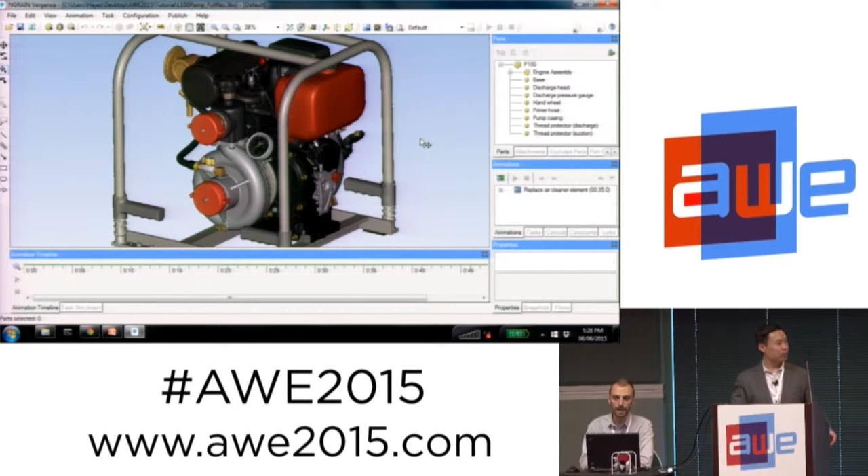Barry kind of alluded to this. This little 3D printed pump that we've got, what you get with that kit that comes packaged with the BT200s.

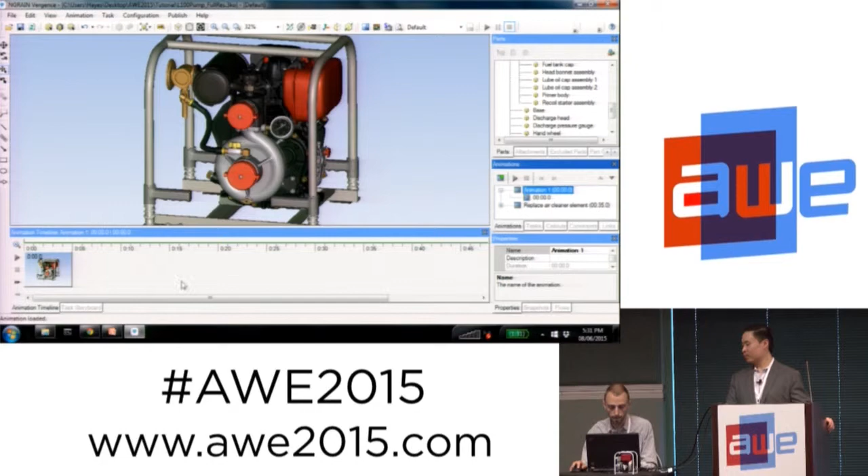Another thing that we can do is create simple little animations. I'll show you what that looks like. All I've done is click this button, say create new animation, and in my animation timeline at the bottom, it's created a keyframe. All I need to do now is manipulate my workspace. Say I want to move in here, and I double click to create a new keyframe. What that does is the system will now interpolate between these keyframes. So this is a very, very simple system to quickly create animations.

I'm going to very quickly move a couple of parts here using a little tool to make sure that they're moving in the right position, in the right space. I'm going to create a new keyframe, and then I do the same with this part. I take it off, and then I want to hide it. You can see what I'm doing here. I've got an animation where I go around to this side of the pump, and I'm removing parts. And that was half a dozen button clicks.

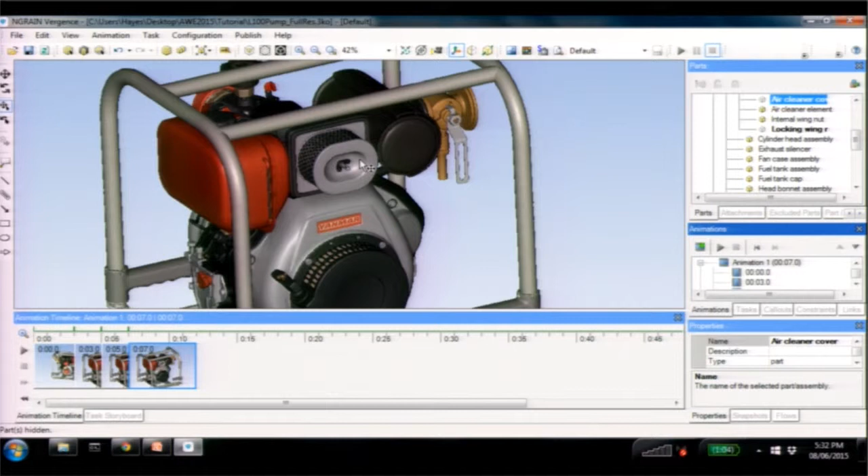Now I've got a little animation that's essentially showing off a procedure that you may want to perform on this pump: how to replace this air cleaner element. I created a slightly fancier one earlier that I'm not going to go through all the features, but you can see what it may look like. We can do things like add constraints that will have a bolt screw out. All of that is built in. These are some advanced features that are outside the scope of this specific tutorial, but I wanted to show you how to do it with just a couple of keyframes so you could see what was going on.

This is a procedure, replacing this air cleaner element, that we're going to actually create the procedure for, like a step-by-step walkthrough that we can show in augmented reality. So now, as a user of this augmented reality app, I'll be able to walk up to the equipment and say, hey, how do I remove that air cleaner element? How do I replace it? And it will walk me through this procedure.

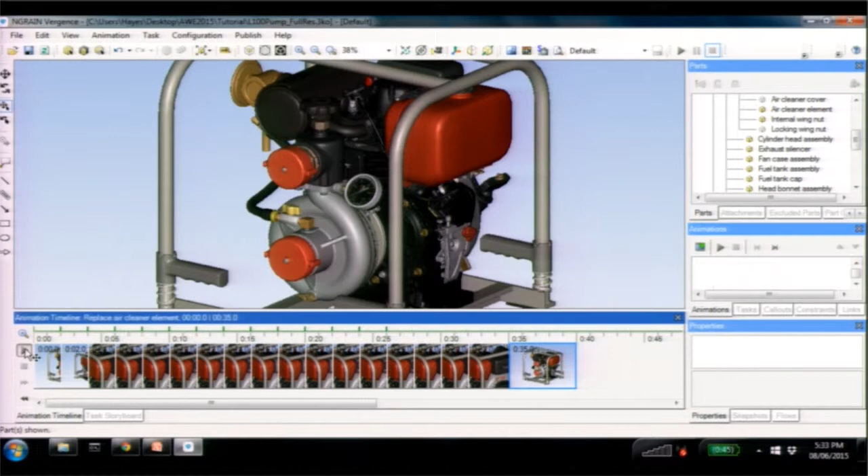So just so we're all familiar with what's going on here, it's a really simple procedure. I remove a wing nut, I remove a cover, I remove another wing nut, and then I basically put it all back together. Pretty simple.

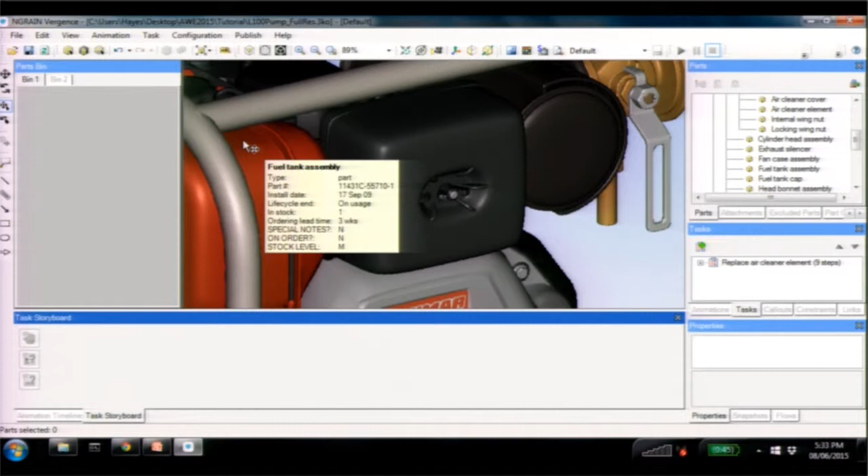Let's do that. I just go over to my tasks panel, and we've got some more UI here. We've got a parts bin over on the left, and we've got a storyboard that's replaced our animation timeline from before.

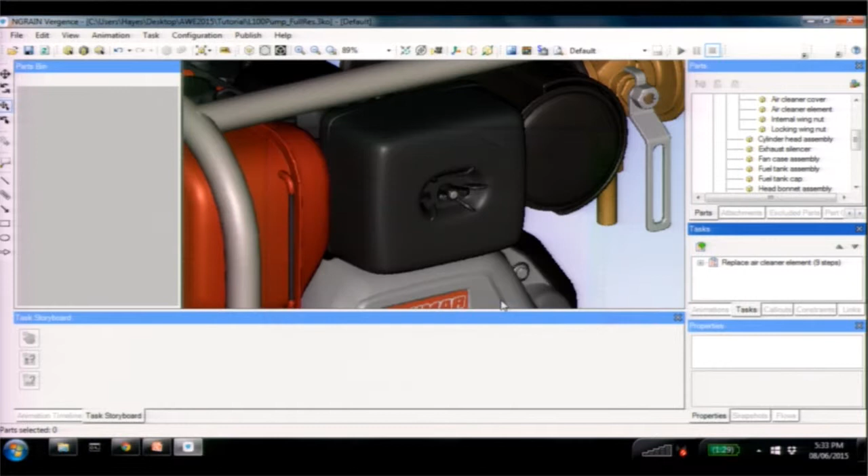Just like creating an animation—for some reason typing in front of people, you always mess it up—I create a new task, and it creates a starting keyframe-esque thing.

So if you recall, the first step of that procedure was to remove this wing nut. All I need to do is pull it out and drop it into the parts bin. Same as with the animation: I make a change to the workspace, and then I create a new keyframe. In this case, I'm creating a new storyboard item.

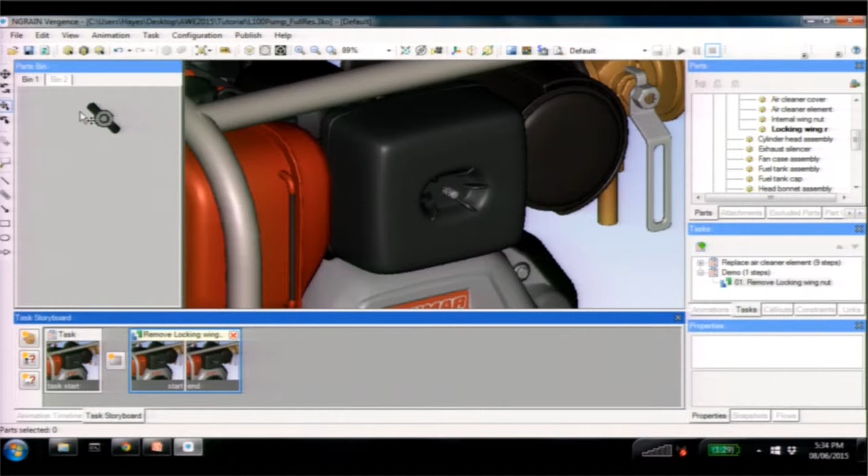So the first step is to remove a locking wing nut. It gives me two keyframes: what the system looks like before, and then an end state, which is what it looks like after. In this case, I've taken the wing nut out and put it in the parts bin. I repeat for this cover, I repeat for this wing nut. You'll notice I mentioned those constraints earlier—this actually works on interaction in the workspace, just as a fun little side note.

Now I want to replace this air cleaner element. I just drag it out. There we go—I've got a 4-step procedure to remove it. So now all I need to do is put it back together.

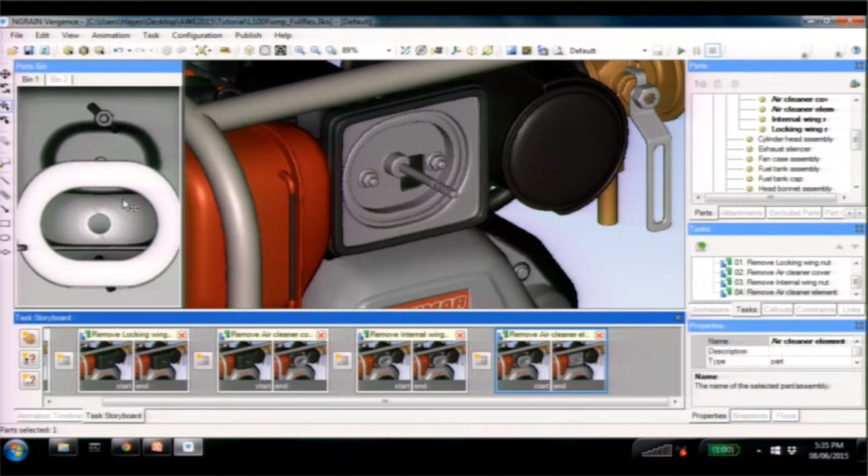I drag this in, and I want to attach it. It's back in place. I've created—so in this case, all these other steps—it automatically named my procedure for me. It gave me an instruction text just because it knew a little bit about what I was doing.

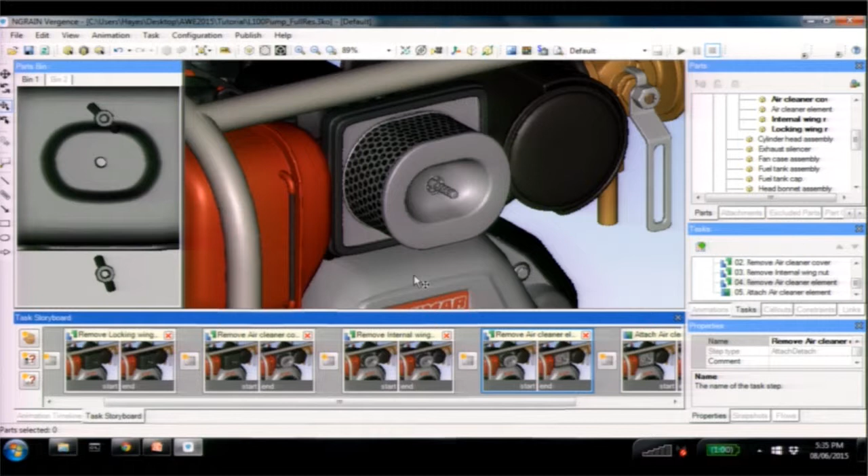I just screw that back on, create a new step. But I happen to know this procedure well, and I know that when people are screwing on this wing nut, they sometimes over tighten it and damage the equipment. So on this step, I'm going to edit a step action and create a little warning message that's going to pop up saying, warning—do not over tighten, or something to that effect.

So now my little keyframe storyboard item has a start action associated with it, meaning as the user is progressing their way through this procedure, as it gets to this step saying attach the internal wing nut, a warning is going to pop up saying be on guard, don't over tighten this. The idea is we need to warn them before they actually do it. It's the equivalent of a big red warning box in your user guide, but if you're constantly going back and forth between doing the work and reading the guide, you tend to miss those things. This way, since it's guided step by step on device, this warning message pops up and stops you from proceeding. We'll see that when we actually run it.

And I just carry on with this. I attach this guy. There we have it. We have, in I don't know how long that's been, but not terribly long, created an 8-step demo procedure that walks you through a procedure that you may want to perform on this piece of equipment.

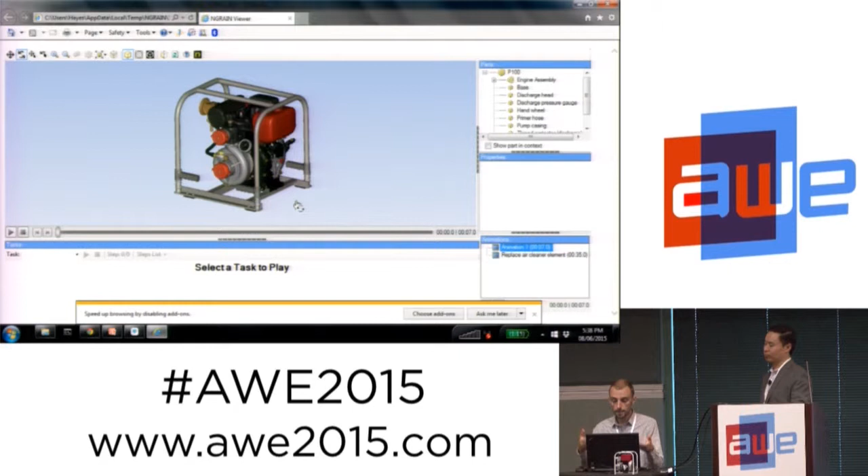It includes some of the features of the other demos that you've seen at past shows, but most importantly, this is a much nicer user experience.

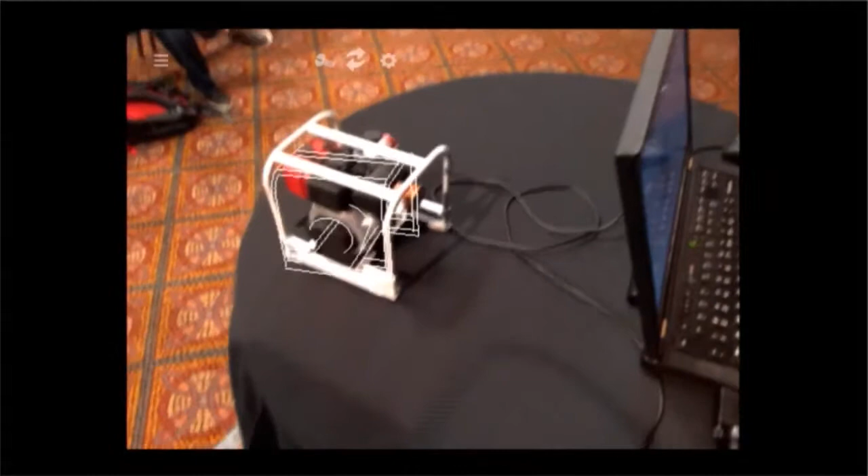So I'm going to hop directly into the live view and start this tracking, hopefully. There we go. Now I'm able to tap and select parts, and I get this nice little outline of the part. I'm able to go to the side here, and if I want to select different parts by name, I can also get access to all of those per-part properties that we added. Imagine I'm now out on a factory floor looking at the actual equipment, and I'm able to wonder how many of those we have in stock, tap on it, and it will show me the information right here. I don't have to go and look it up at a terminal somewhere or go into a back room.

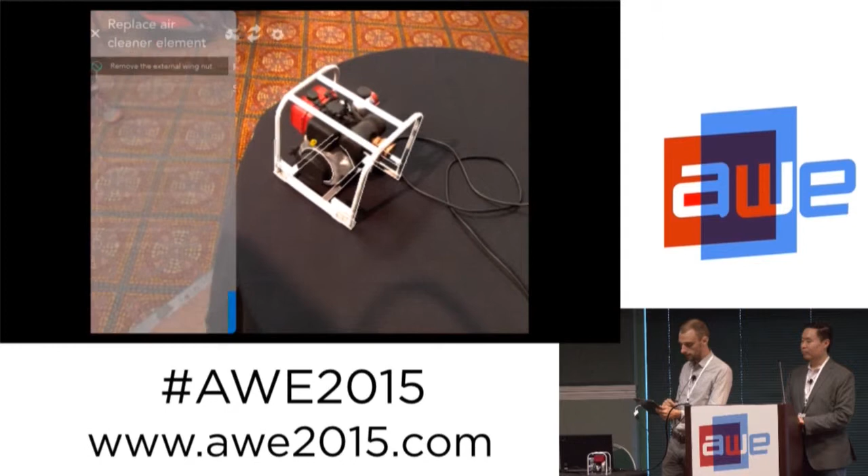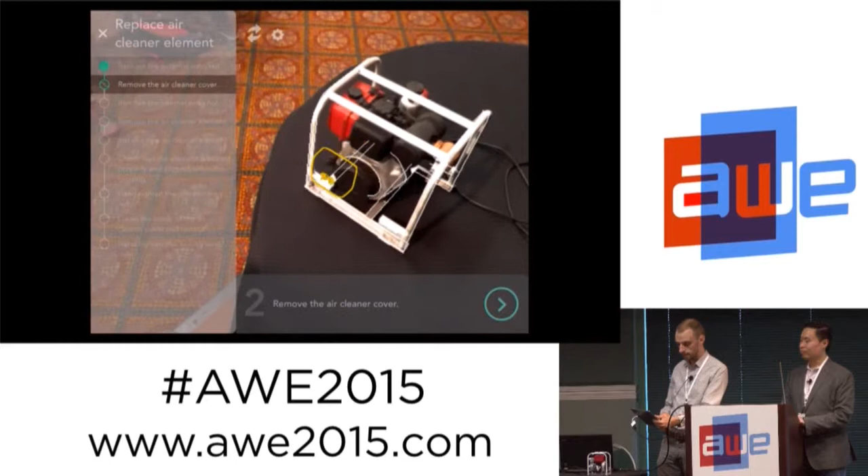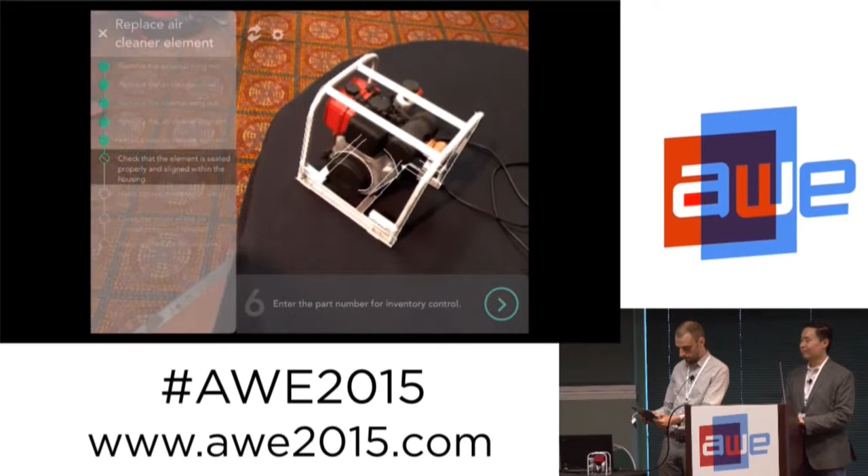That's one thing, but the important thing is let's go in and replace that air cleaner element. So I select a task, replace air cleaner element, and it shows me remove the external wing nut. That's the first step that we made. I would then physically remove that wing nut and tap, and it goes on to the next step: remove the air cleaner cover. I work my way through this procedure as we did before. I remove the air cleaner element, install it, check alignment is correct, and here's that alert I was talking about. It's now stopped me from progressing through this procedure until I acknowledge that I'm not going to over tighten this wing nut as I'm putting it in.

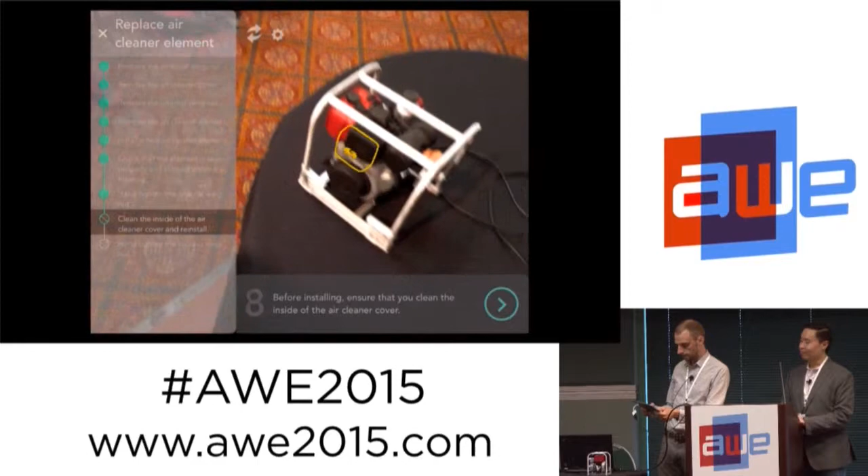Things are wigging out a little bit. Anyway, that is actually all I really wanted to show here.

With that, do you have anything else to add before we go to questions? I think what I'd like to do is open the floor up to questions. I think hopefully you've gotten a sense for what you can do inside NGRAIN Vergence, as well as how the path from getting from source content out to deployment looks like with our workflow.

Hi, can we switch to... Yep, can we switch the... Yeah, thanks. Maybe we can just repeat the question.

There we go. Okay, I work at a college that deals with TVET stuff, and basically it's in another country. So two questions: A, can you add language prompts from other languages, or is it...

Yes, no problem, we can support that. And what about audio? Yes, based on the keyframes, in the animations, absolutely. Okay, thanks. Yeah, no problem.